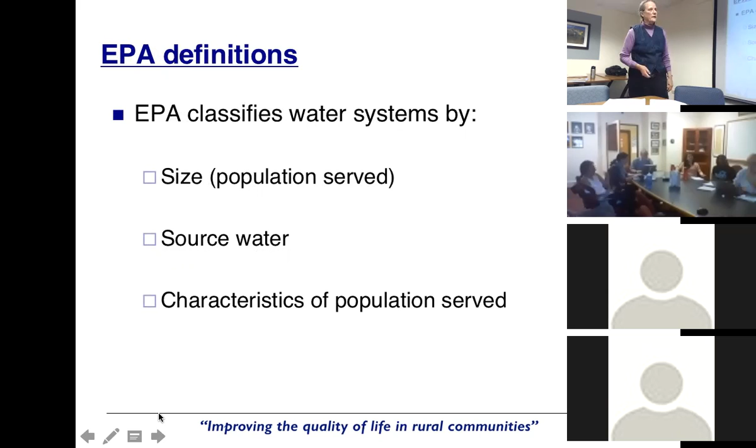So first, a look at size. From EPA's website, there are these divisions in system size, based on the number of people served. For a long time, we talked about small water systems as 3,300 and under. But in fact, the reality is that the centers and many EPA-funded projects deal with systems going up to 10,000 in population. We'll talk a lot more about the breakdown of these categories in just a few minutes. Okay, so that was size.

In terms of source water, we have 3 categories as well: groundwater, surface water, and then groundwater under the direct influence of surface water, often called groundwater under direct influence, or GWUDI. You'll hear Bill and me say GWUDI probably because we use that term a lot.

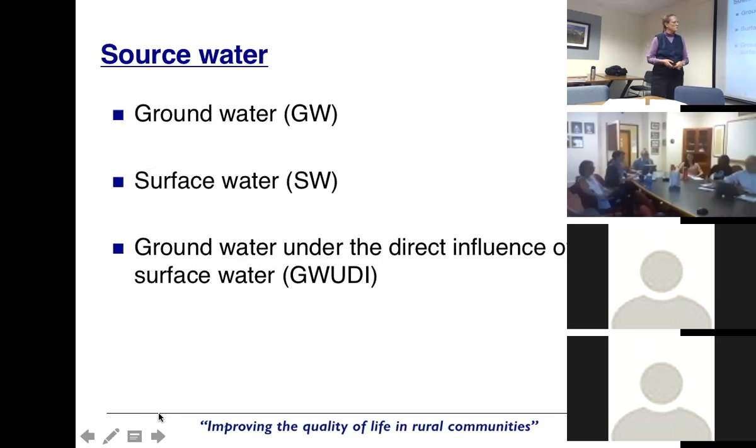In terms of public water systems, here are the definitions. It's water consumed by humans through some means of transporting that water, serving at least 15 service connections or 25 people, at least 60 days a year. A pretty big deal here is that there are over 150,000 public water systems in the United States. We'll talk more about how that breaks down in a minute.

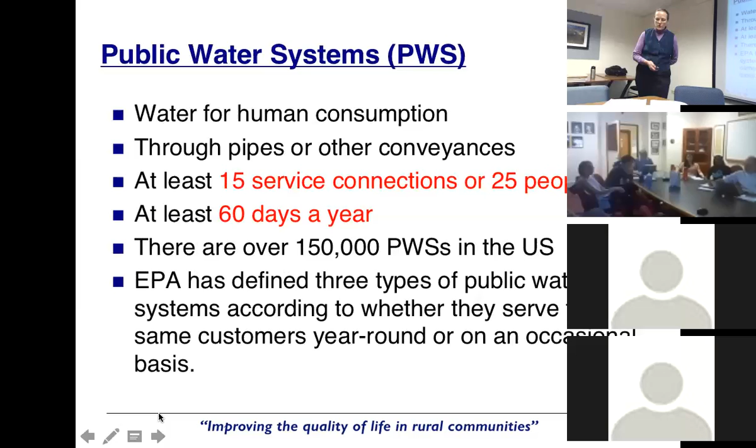EPA has defined 3 types of public water systems, 3 categories, based on who they serve. First is a community water system, a public water system that supplies water to the same population year-round.

The next category is a non-transient, non-community water system. That's a system that supplies water to at least 25 of the same people 6 months a year, but not year-round. Examples include workplaces, schools, and hospitals—many hospitals have their own water systems.

The whole point of these categories in terms of deciding how to regulate drinking water quality is how much exposure people are going to have. If people are passing through, they're not going to have as much exposure as people who work there every day, or certainly not as much as people for whom that's their water supply year-round.

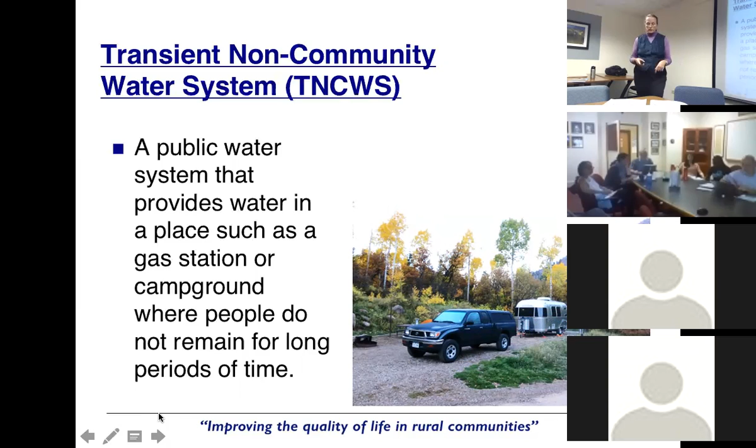One of the projects RCAP has done is to look at SDWIS data, Safe Drinking Water Information System, a terrific source of information about what's going on in the whole country in terms of drinking water.

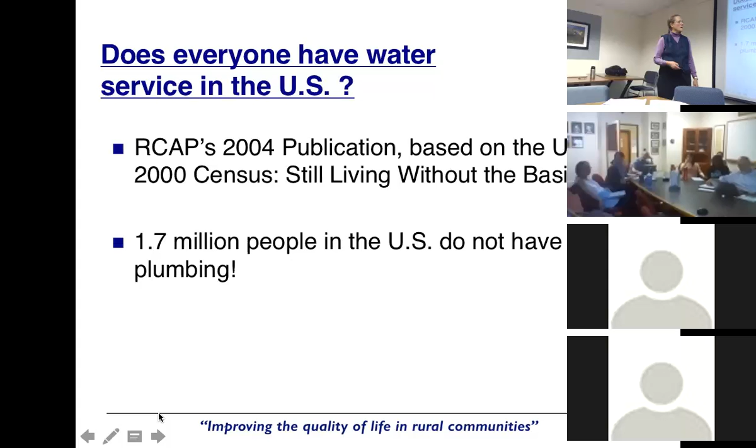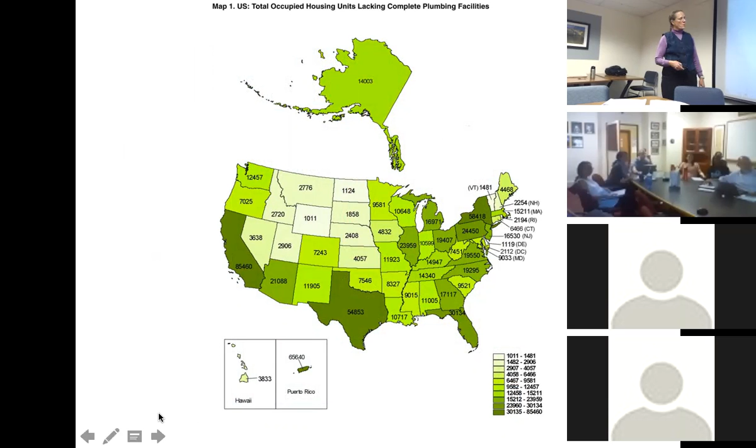Here is some information about who those people are who don't have indoor plumbing. This is a slide that breaks down the 1.7 million people by numbers of systems in each state. But it's probably more helpful to look at this in terms of the percentage of systems in each state.

You'll see that leading is Alaska. Alaska has 6.32% of its households, based on the 2000 census data, without indoor plumbing. Okay, maybe not too surprising. Puerto Rico is a close second.

And Puerto Rico is sitting at 5.2% without indoor plumbing. After that, we have Arizona and New Mexico coming in between 1 and 2% of households without indoor plumbing. And then a whole array of systems here that are running at about 1% of households without any indoor plumbing.

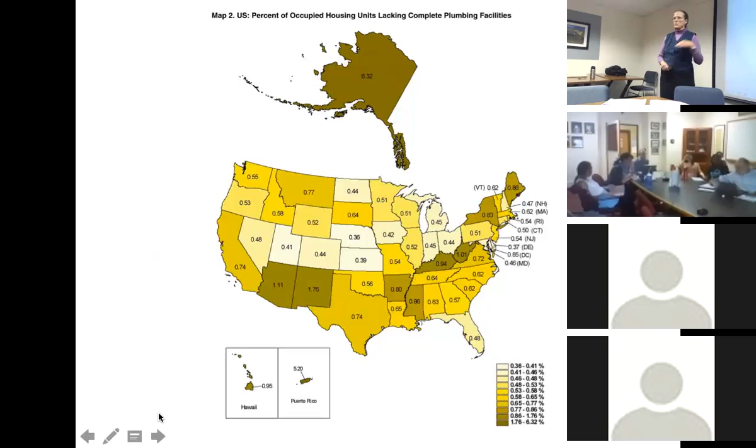Now, I wanted to let you know that this is based on the 2000 census data, but unfortunately, between 2000 and the 2010 census, the Census Bureau decided that they no longer would collect data on indoor plumbing or not. So unfortunately, we right now don't have a way of knowing whether we're making progress on that or having a good sense of how many households actually lack indoor plumbing.

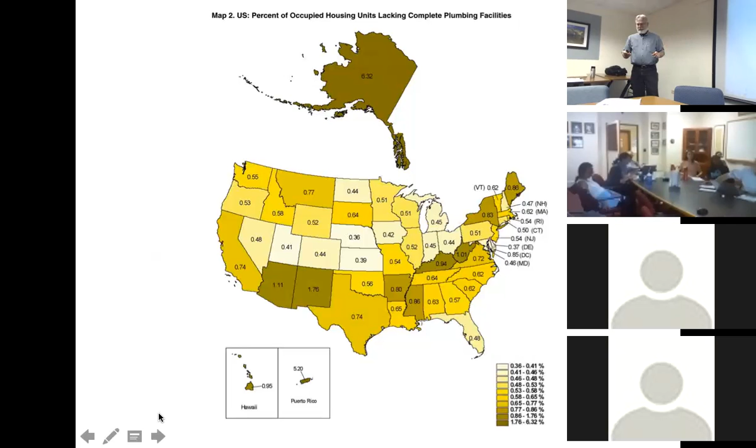And I should make one other point here too, is that these are data for places that do not have complete water and sanitation services. It doesn't have any indication in there whether or not you've got a water system that's just on the edge that's getting held together with duct tape and baling wire and so forth. So that's just kind of the tip of the iceberg. It doesn't show you how close we are to issues that might cause public health problems.

So what I wanted to do now is take a little look at comparing some of the characteristics of drinking water systems from small systems to large systems. Very general discussion of some general characteristics.

First thing is operations. So you'll find that small systems have either a part-time operator that does a whole lot of other things, either for the community or outside the community, or they have a contract operator that deals with a whole bunch of different water systems. So they don't have somebody that's at the system full-time, spending their full attention on it.

Operators at small systems generally are required to have a lower level of certification, and they have a low level of certification. The treatment and distribution system operation is usually combined, whereas at larger systems, you may have somebody that only takes coliform samples, or that only works on the turbidimeters on the filters. It's very focused. And when we're training operators, we actually find that small system operators have a better grasp of the whole thing because they got to deal with everything. Whereas large system operators, their work life is focused quite possibly just on one thing.

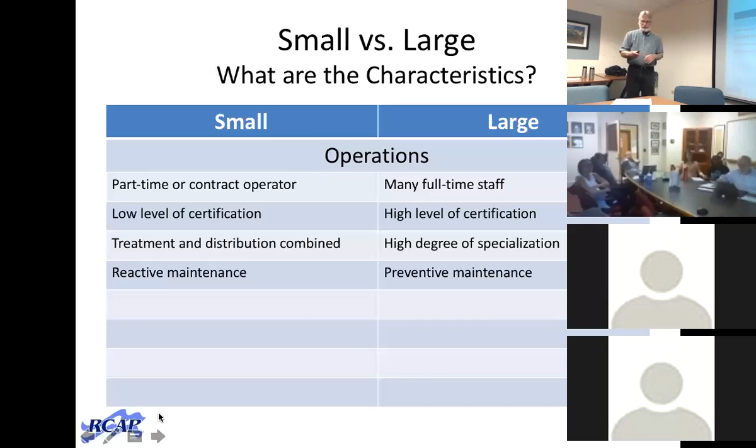So let's look at the equipment that you normally find in small systems. They often have just disinfection or a bag filter or very simple equipment, whereas large systems, of course, can have a much higher level of complexity with their equipment.

In terms of capital cost per connection, the economies of scale are such that a small system will have a much higher cost per connection for the whole equipment in the system, whether it's the distribution system or the treatment. From my experience, it can run anywhere from 10 to 100 times the cost per connection from a small system that serves maybe 100 people, even up to 1,000 people, to a large system that serves a couple hundred thousand people. So as a result, your water bills are going to be 10 to 100 times bigger if you're paying the full cost for a small system.

In terms of monitoring and sampling, for small systems that's often done by the operator and it's all manual. Whereas with large systems, you can have some automated sampling and monitoring for process controls, or you have somebody whose job is just to take the compliance samples and get them to the lab.

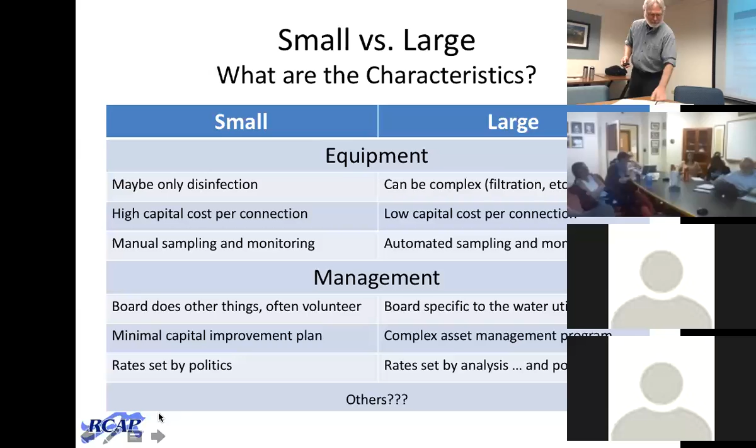So let's take a look at an example of some characteristics of a small system. Here's one I worked on a couple of years ago—it's a homeowners association in Ouray County, Colorado. Some of the physical characteristics: it's at 8,600 feet, so you'll have winter issues up there in terms of access as well as equipment problems. They've got that famous ice donut in their storage tank that goes up and down and tears everything up. They have 93 connections, so something around 200 people, and they are year-round folks.

Their source is a spring that's been determined to be groundwater under the direct influence of surface water, so it's a GWUDI system and they have to filter. Typical of that kind of source water, they see a large variation in turbidity as well as the flow rate—the amount coming out of the spring available to them. They do have a well or two available to augment that supply, but it costs them a lot more to use the well water than the spring water, just because of the pumping characteristics of where the well is.

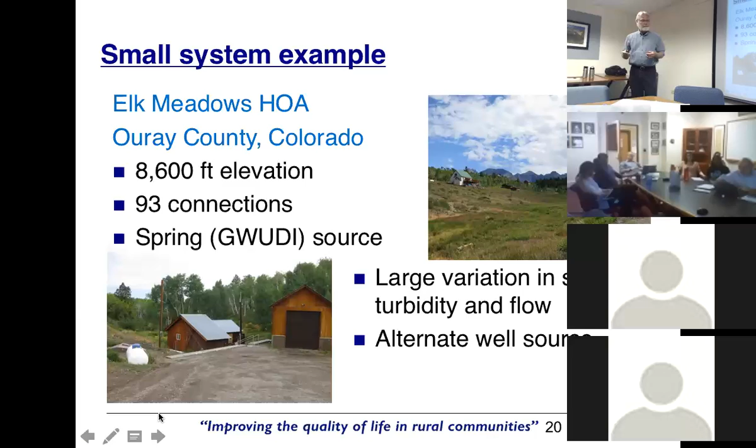They've got water rights to that spring, and anybody familiar with water rights in Colorado knows they need to use that water right in order to keep it, and they want to be able to do that. So the equipment they've got is a spring box with essentially a submersible well pump in it that pulls water out of the spring box and feeds it into their system. They apply a coagulant—it's a polyaluminum sulfate coagulant they've been using for quite a while.

It goes into a pressure media filter, a sand filter, and from that into a bag filter/cartridge filter arrangement—that's pretty much their compliance technology. That satisfies the treatment technology requirements for their system: that they've got that bag filter. They then disinfect with hypochlorite and go into two storage tanks—an underground storage tank, and then they pump up to an above-ground storage tank.

Just taking a look at some of the photographs here: there's the spring pump with a housing around it—I believe the reason they've got that is for cooling, though I don't remember exactly why. It's very shallow, only a few feet down into the spring box. It goes into this pressure sand filter, which in this case is a modified water softener tank—we'll get into that in a second—and then into a cartridge filter bank, where the fellow is holding up one of the cartridges instead of the bags. This unit is capable of using either bags or cartridges.

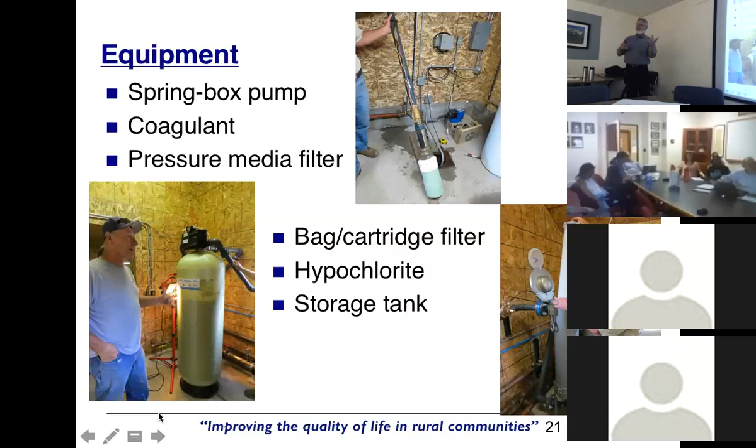So in terms of capacity—and here I'm talking about technical, managerial, and financial capacity—it's only about a half-hour drive on a gravel road to the nearest town. But like I said, it's at 8,600 feet, so in the winter that can be an issue if you need to get spare parts, or if you've got an operator off-site trying to get up there. Their median household income is around $44,000 a year, so they're right at about 80% of the statewide median household income.

Some funders use that as a designation below which a community qualifies for some assistance in terms of their funding terms. So they're not poor, but they're also not extremely wealthy. They've got some resources available.

Their water rates are fairly substantial, and I wasn't able to find that exact number when I was pulling this data. I think they're probably around $100 a month or so as their base rate.

They have a contract operator that is not on site, and he is the operator in responsible charge, the ORC. He's the one responsible for the system, so any decisions that need to be made have to be made by this person who's not on site. There is an on-site, non-certified operator who is a member of the community and can get to the facility, walking or skiing if he has to.

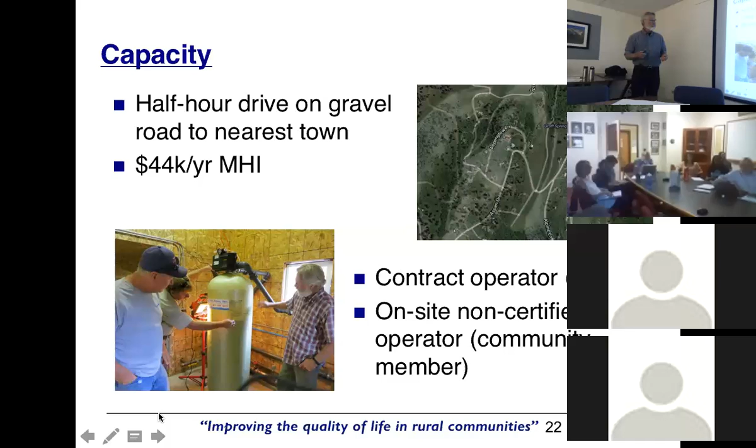Okay, so another capacity issue. Here's an as-built drawing as an example. They do have real drawings, but this is what I got when I asked them for something. It is color-coded though, so I'll give them that, extra points for being color-coded. And all the information I needed was on there, so that's a good thing.

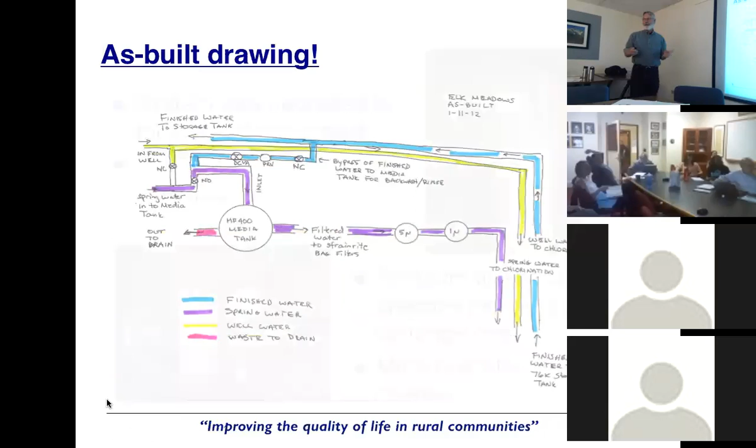So what was the problem? They were having issues with a similar system that was installed, a pressure sand filter with a bag filter and chlorination afterwards. It was probably 20 to 30 years old and reaching the end of its useful life. There was lots of corrosion, and they couldn't get spare parts for it, so they had somebody design a replacement.

Did I do that? No, it's me. I'm just trying to respond to the folks. I couldn't get to this. Just bear with me a moment to make sure everybody's good. All right, we'll get to these questions afterwards.

My apologies, folks, sorry for the distraction. Okay, back to it. So they decided they needed to do a bunch of upgrades to the system, including distribution system upgrades, water tank upgrades, and treatment system upgrades.

So they went out and got an engineer in that part of Colorado. This is western Colorado, much less populated than along the Front Range where we are. They got the engineer to come in, do a design, and replace the facility with a new pressure filter and a new cartridge filter after it.

So they installed it and ran it to test it. They weren't able to get the flow rate through it that they needed, because they wanted to be able to pump at their water right flow rate. They weren't able to do that.

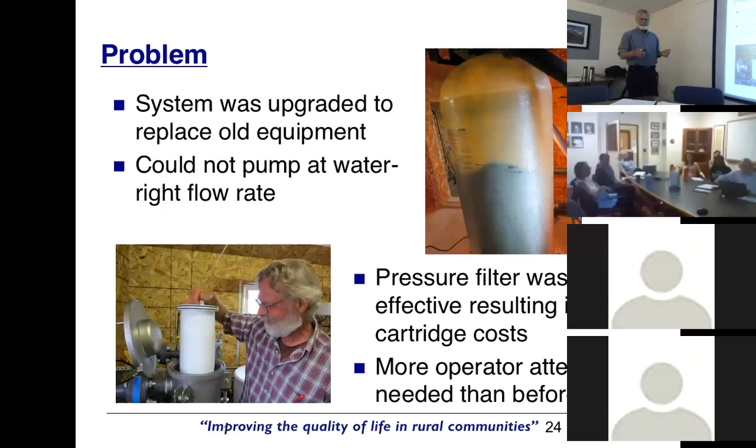So what we did was a bit of an... I think you unplugged me. Did you? Yeah, I did not. Let me just click here, then you'll be able to go now.

So we were asked to go in there and do an investigation. We tried to figure out, is the pump that's in there pumping the way it was supposed to, and is it a big enough pump for the system they've got? The second question was whether this pre-filter was operating the way it should, or whether some things needed to be changed on the design.

Keep in mind that the system didn't have the capability of doing this themselves, and the engineer, this wasn't his primary project that he had worked on. It was a small project for what he was working on.

So what we did was go in and do a pump test, very appropriate technology, a 55-gallon drum and a stopwatch, to make sure the flow meter was working right. From then on we used the flow meter, though actually the flow meter was in the part of the system that we couldn't use.

So we used the drum to do the entire pump curve, and the blue curve here is what the actual pump was pumping. The red is the curve for the pump itself. So for some reason, it was not pumping to its curve.

Then the second thing we did was a system test, a system curve. Luckily the pump had a variable speed drive, so we were able to put varying flow rates through the system and develop a system curve that said, with clean filters, here's what the pressure drop looks like through the system. Where these two curves cross, that's what you're able to do. Their water right was about 36 gallons a minute, which even if the pump was doing its design, it would just barely meet.

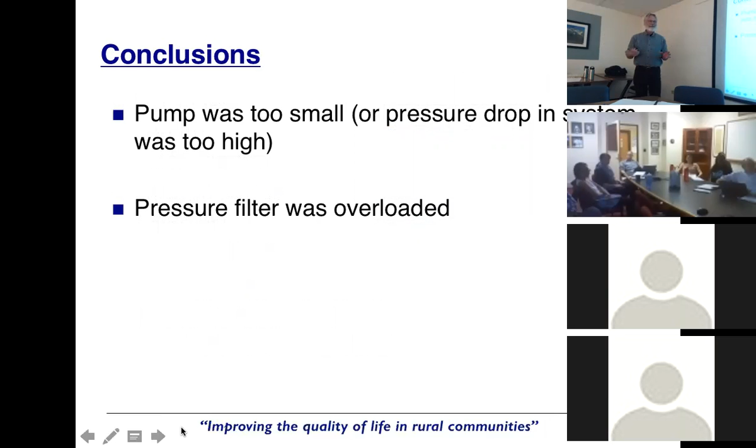So there's a couple things we were able to conclude from that, but the final test we did was we lowered the flow rate on the pressure filter and tested its performance using turbidity as a measure, to see whether it was the flow rate through the filter or the filter itself that was a problem. What we found was the pump was too small, or the pressure drop in the system was too big, and the pressure filter was overloaded. I'll give you some numbers in a minute, and for folks familiar with filters, we'll probably hear some sighs or gasps from the audience.

So the solution was to replace the pump and get a larger pressure filter, and what happened was the engineer redid all the work, redesigned it for free. The manufacturer also took back the filter and replaced it at no extra cost. So it didn't cost them very much to redo the whole thing.

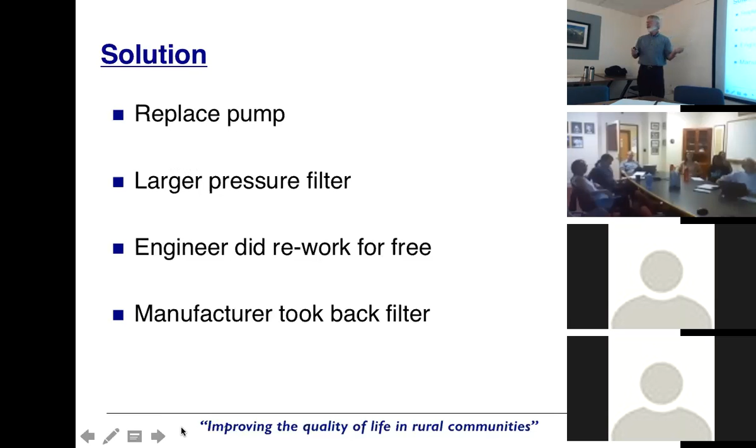But what caused this? This is kind of the gist of why this is a characteristic of a small system. What caused it was the manufacturer drove what the engineer did. The manufacturer said, here's this filter that we've got, yes you can load it at 21 gallons per minute per square foot and it should be fine. There wasn't any pilot testing done on the system to determine what the pressure drop through the system would be at the flow rate they wanted. There was no ability in-house to do any kind of review of the design.

And finally, the state reviewed it and said it was okay, because the technology satisfying the treatment technology requirement was the bag filter. The pre-filter was not part of the compliance. It just ended up costing them more to do it. It worked, they got water that met their specs, but it cost them a whole lot to do it.

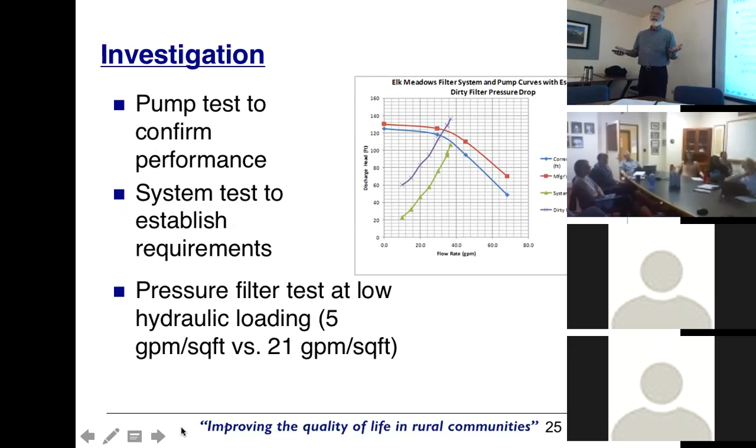So they were loading it at 21 gallons per minute per square foot instead of 5. And 5 is the normal number that you would load a filter like that at.

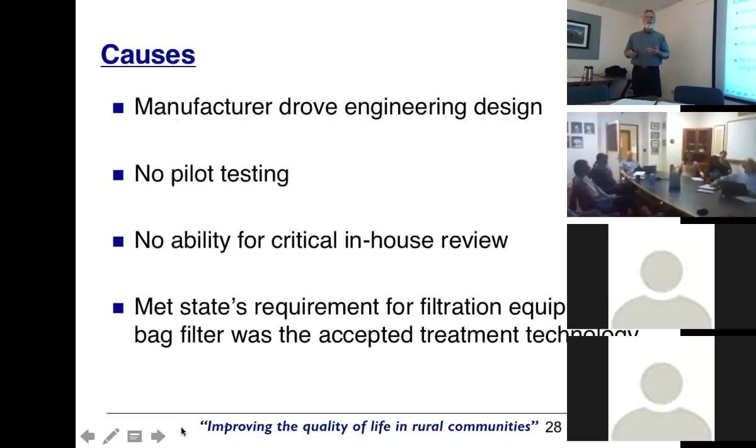So anyway, hope I'm not making folks dizzy on the online there. Nobody's dizzy, okay, I don't see anybody falling over. So this is just an example of a small system and what we might be concerned with when we are looking at technologies for a small system.

So now we've got a chat function, and we've got folks in the room here. I think it would work best if anybody with a comment just jumps in. But what type and size of system are we targeting with the technologies we're using in the centers? So what type and size are the targets of what we're doing? Anybody got a comment on that?

There's no number that would set it as a certain size. Well, but from your experience, what's the smallest conventional sand filter you've seen? I'd say probably over 5,000.

Okay, yeah. How about, are we getting any chat in that thing? Anybody raising their hand or doing anything? No chat from there, but that's part of the thing we're going to have to address this next go around. Why don't we have people just chime in that way instead. Everybody is unmuted now. Anybody got any small systems perspectives on how small a system y'all want to be working on?

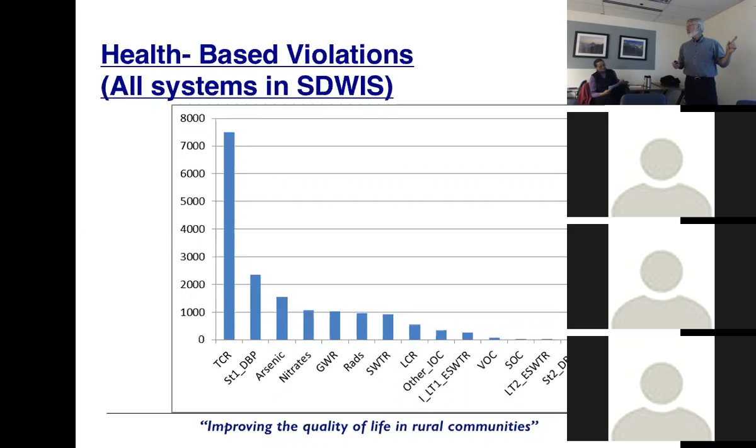If we looked at health-based violations with all systems, again total coliform rule is a biggie, and then disinfection byproduct rule is next in line. Then we've got arsenic and nitrates after that. So is this 2013 again? 2013, yes, just SDWIS data.

Now if we take a look at health-based violations for systems serving less than 10,000 - all systems was the last one - we've still got total coliform rule, disinfection byproducts rule, and then arsenic, and RADS moves up, nitrates moves way down. So disinfection byproducts and total coliform rule are up at the top.

So let's look at these in a table, and let's make sure I'm clear on exactly what I'm saying here. This shows that 95% of the total coliform violations are from systems using groundwater. So that's what this table means. Total coliform rule violations predominantly come from groundwater systems. Disinfection byproduct rule violations predominantly come from surface water systems, but we've still got issues with groundwater systems.

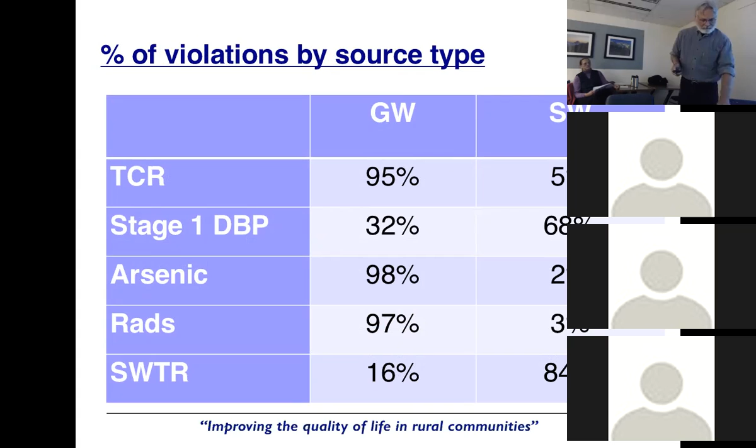Yeah, so that's interesting. Arsenic, of course, comes from groundwater, RADS in groundwater, and surface water treatment rule, of course, comes from surface water. Although it's important to note that you can be a groundwater system that violates the surface water treatment rule simply because EPA defines systems by their predominant water supply. So if you have multiple water supplies, which lots of small systems have, they'll have a spring source they use 5 months out of the year, and groundwater they use 7 months out of the year. They would be called a groundwater system, but they still have a surface water supply. Important nuance to note - right, very good. And if they violate any of the surface water treatment rules, things like treatment technology or turbidity or disinfection, then they would end up with a violation.

So now if we normalize that to the number of systems - because remember there's a bunch more systems that are groundwater systems - this says that 4% of all the groundwater systems have total coliform rule violations. So now we know there's 4% of these systems that need some assistance with total coliform rule compliance. For surface water systems, a much smaller percentage - half a percent - have got total coliform rule violations.

Disinfection byproducts: 3% of all the surface water systems that are less than 10,000 people have got disinfection byproduct problems. And then the rest of the stuff is fairly small. Surface water treatment rule: 2% of the surface water systems have got issues with the surface water treatment rule, and again that can be disinfection, treatment technology, or monitoring problems.

So let's focus in on these total coliform rule violations. The key thing in this table says that up to systems serving 3,300 people, we've got problems with monitoring and reporting violations for total coliform, but after 3,300, size doesn't really matter.

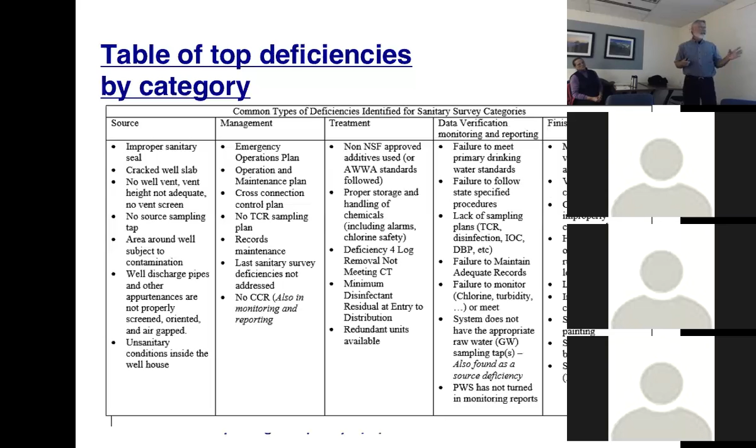So from our standpoint, perhaps that one bullet, or these few bullets right here, are the ones that we need to concentrate on.

What happened to the discussion thing? Okay, sorry. So let's see how this one works.

So all those technologies that you're working on, and I know we don't have all of our technology researchers in here right now, but what are the compliance issues that you're trying to address with the technologies that we're looking at? And Chad, can you give us—because I know the DeRISK Center has in our purpose—which compliance issues we're addressing.

So absolutely. So for DeRISK, the primary focus of compliance issues that we are addressing for small systems is compliance with microbial and disinfection byproducts related issues, first and foremost, and a little bit with nitrate.

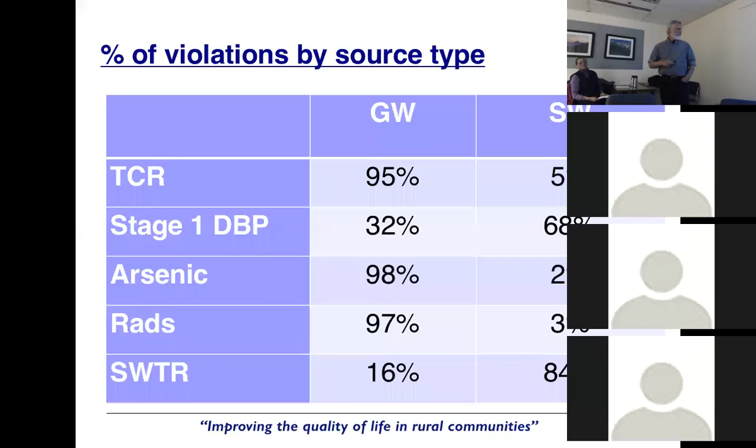And for folks that are elsewhere, if you don't mind, you can just chat to all—we did get chat up, and so John Meyer is connected here with chat, and we can read off things you want to chat in about other compliance objectives that you are specifically researching.

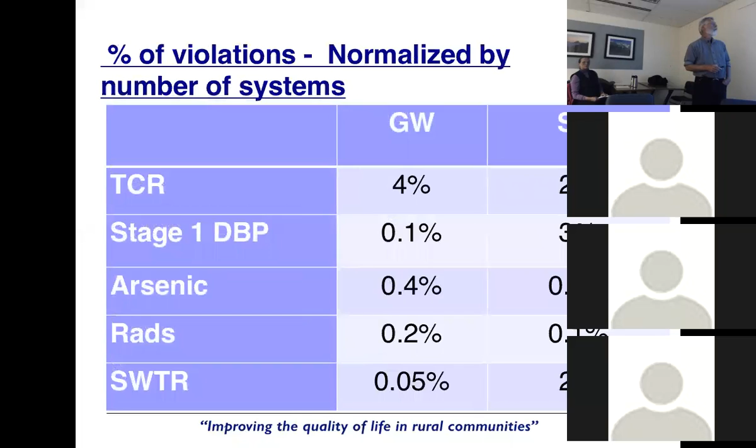I know that the focus in the WINSSS Center, they've got some unique views of multi-contaminant removal with ion exchange, like Trevor Boyer's group at Florida, so looking at both cations and anions. There's some focus on using different disinfection means, using ferrate at WINSSS. So those things are all great objectives that fit in with the small systems view. I think there's some look at fluoride and arsenic as well in a couple of these places. But always look forward to hearing other feedback.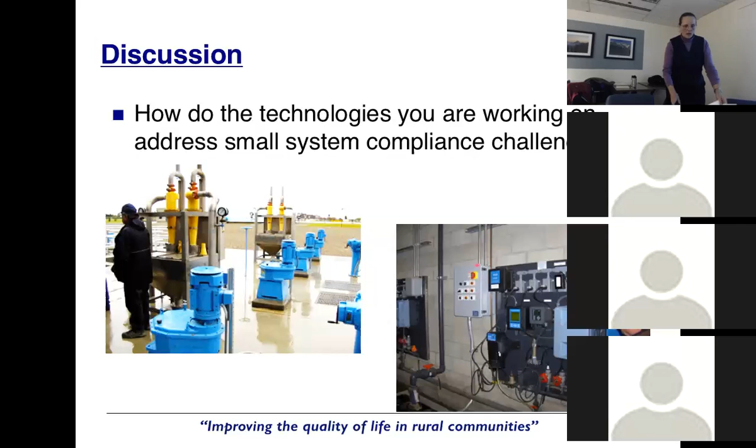Okay, I'm going to talk quickly in the interest of time about capacity issues. Back in the previous century, when Bill and I were in graduate school in this very complex, capacity kind of meant how much water a plant could treat per unit time, usually a day. In those days, our offices were down the hall, and what was Bill's office is now a women's room down this wing. So a lot has changed since then, including how we use capacity.

The word capacity, as an outcome of the 1996 amendments to the Safe Drinking Water Act, EPA put an emphasis on 3 areas required for the success of safe drinking water provision by a utility: managerial, financial, and technical. So success in protecting public health through safe drinking water required not just engineering solutions, but financial viability and managerial competency as defined by a variety of areas.

Very exciting. At RCAP, we've developed some capacity assessment tools that I'll talk about quickly. EPA's emphasis coming out of that time, and I actually worked with them on capacity issues in the late 90s, EPA's emphasis was making tools available. If any of you have seen step guides, they have some fabulous tools, and the step guides came out of that late 90s and early 2000s era. Lots of emphasis on training and technical assistance, not only in the technical arena but also in management and financing of systems, and then improving facilities.

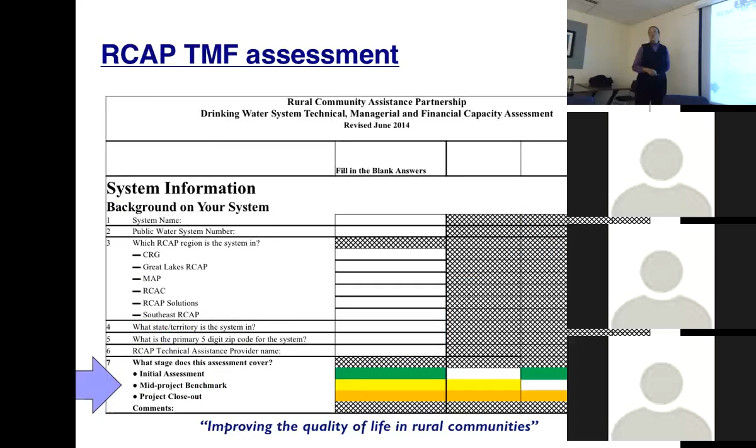We can also use it for a mid-project benchmark, to take a look after we've been providing training and assistance for a while, at how are we doing? Are we making progress? Are we addressing the correct issues here? Or do we need to go back and revise our strategy for helping this system achieve and maintain compliance? And then finally, for project closeout, as we evaluate how successful we were.

Couple more quick things I wanted to show you. The colors are based on a variety of things. We have several categories, including in progress, deficient, or acceptable, and then this area over here of critical concern. Where there are blanks is where you fill in information about that particular system. We're looking at the technical tab of this tool, but we have similar managerial and financial tabs.

We can make this tool available to anybody who wants it. I've sent it out to Scott and Chad in the past, and maybe some of you also were recipients, but let us know if you want to get this.

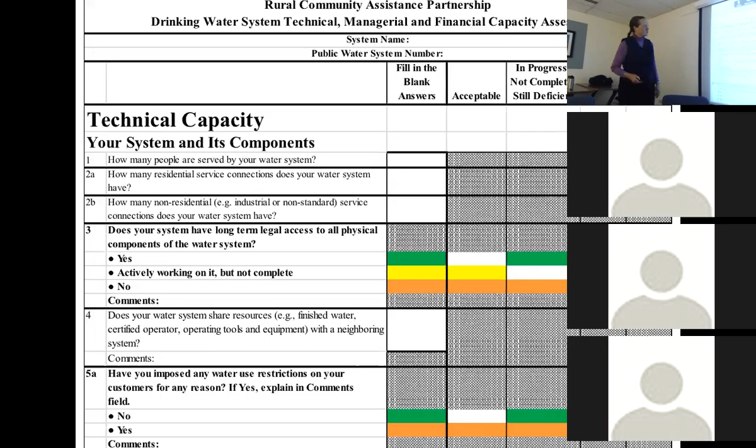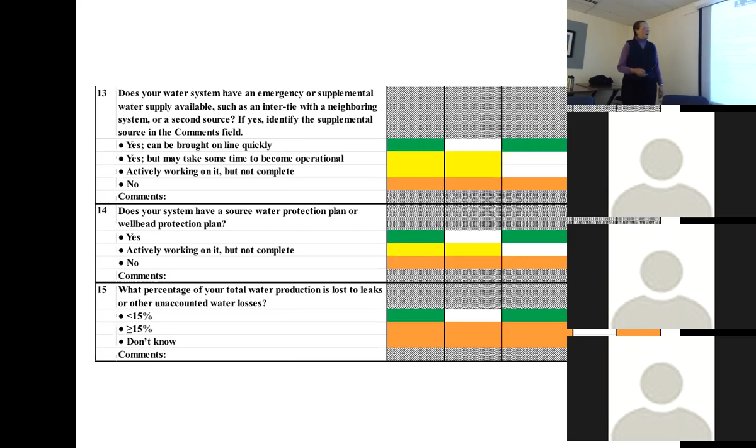Just a couple quick looks at typical questions: Do you have an emergency or supplemental water supply? Do you have a source water protection plan or wellhead protection plan? You see these are various categories here. What percentage of your total water production is lost to leaks? That's a big issue out there that we also help deal with. And please note that not having a certified operator on duty or on call at all times is a critical concern here.

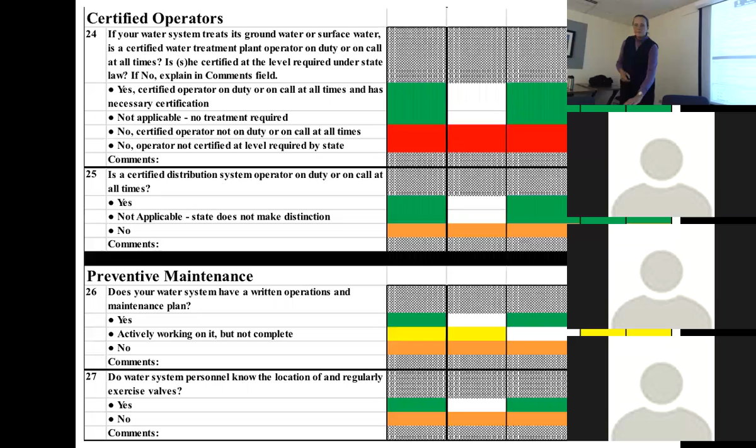And coming workforce issue is a huge issue in dealing especially with small systems. It's a problem in all size systems. A 10-year-ago study showed that a large percentage of utility workers were within 10 years of retirement. Some changes in stock markets may have saved us, because maybe if people had retirement plans, they decided to work a few more years.

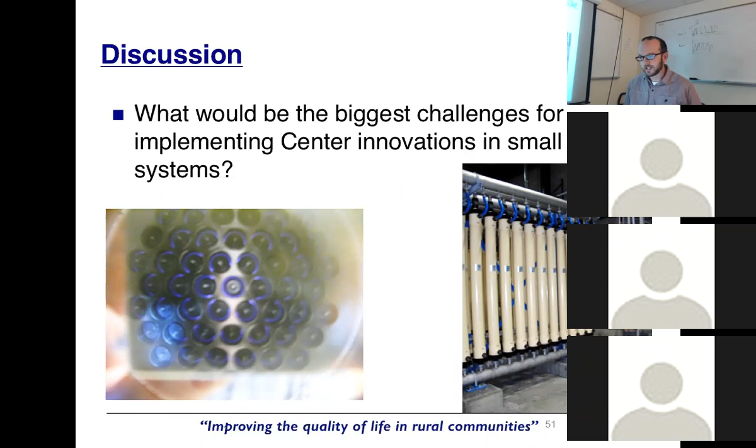I'll also put on screen another great thing the folks at WINSSS are working on: the potential impacts of the systems they're working on, in terms of key issues on the left, the number of systems assessed that are impacted by those things, and what those populations mean in terms of systems serving fewer than 10,000 people. And like every good EPA-funded research project, there's a bingo or battleship-style key code of which projects are assessing those things.

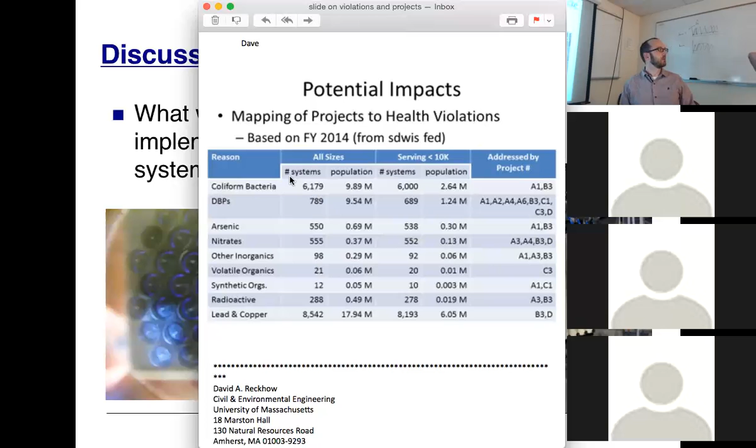Could you get the light, please? Oh yeah, we can turn the light on back here. Thank you. Well, we may have questions coming up on screen. I don't know.

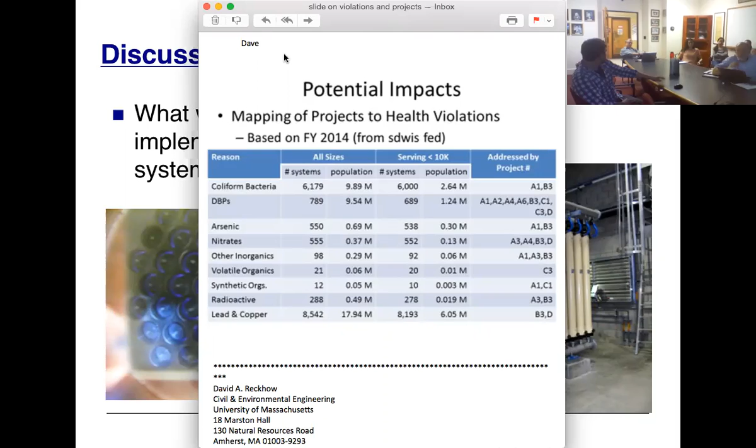Yeah, terrific, those are all great things. One of the things I find most exciting is that stakeholders in these issues, whether states, technology providers, or first and foremost small systems, are reaching out and connecting with folks within the DeRISK and WINS centers to start in the US what folks have already been doing in Canada with WaterNet. The actual efforts to move this ahead by solving legitimate problems through those collaborative efforts is already underway. I think we're going to have lots of real world metrics to show the impacts of the work being put in by students and researchers.

So, good points. Other thoughts, feedback? Let's see.

Nice compliments from other researchers saying great presentations in the chat. Great to hear, thanks. So, terrific. Any other thoughts or questions from folks?

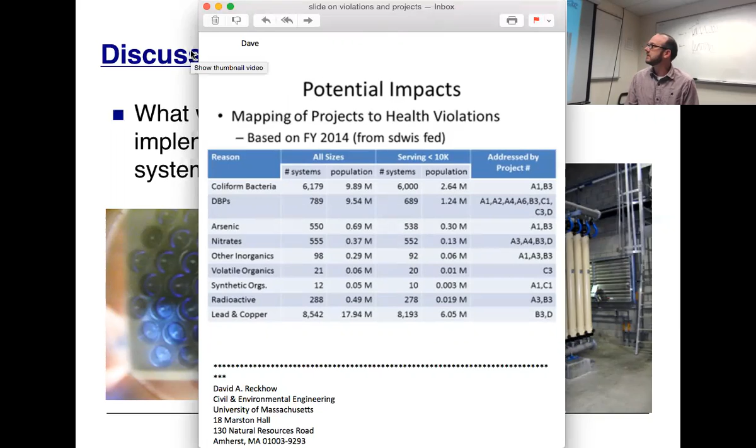Where do we heading next, Chad? We had a schedule for Steve. I heard we had some dates. We don't have the finalized schedule yet for Steve Wilson, who's part of the WIN Center, to talk more about some of the statewide challenges associated with implementation barriers, as John Tobias just described. We will nail down that schedule and get it on the calendar for everybody. Since this platform facilitated things fairly well, we'll probably keep this same approach, with a couple little things to improve. We're eager to get that scheduled, hopefully 2 more between now and Christmas break with the academic calendar in mind, then starting after Christmas break for folks to begin student-based research plans.

It's a great question. A.E. Riley poses the question, will this webinar be available online? If so, where? Yes, we are recording this. Yes, we have the intent to post these on the drinkingwatercenters.org joint website as kind of the seminar series. That is the website that all 3 centers are intending to collaborate and submit content to. Knowing this is the first go of this, we'll see how quickly that can be done. I would like to have it up before the next seminar is scheduled and hosted.

Another comment is that some of you have heard us talking about teaching a course for credit on small systems. That is actively being pursued. We plan to have an abstract out on that course, at least in terms of general content, in the next week. We'll be talking with some other faculty members at other institutions about picking up some modules in the class. It'll be a distance learning setup, with more details forthcoming quickly, I hope next week.